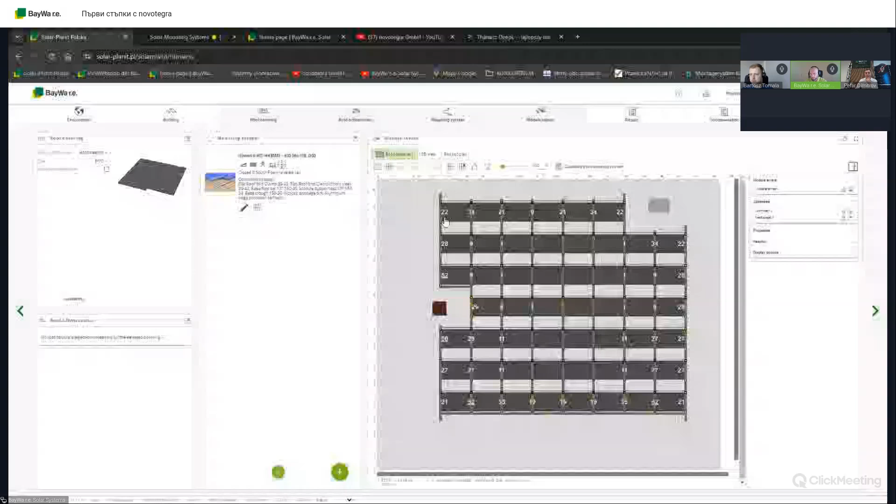Look at this here. You can see the numbers here. This is the ballast which is needed on the rails. It's put on the rails. But in the middle of the module field, look at this, there's no ballast. That's because all the modules on this module field are actually connected on the same rails. So you don't need any ballast in the middle of the field, but yes, of course, some ballast on the edges. But look at this ballast, it's not so big, 20, 27, maybe 50 kilos in some places.

So you can also see the average weight, like I wrote in the chat before. The average weight of the PV system, the construction, the modules and the ballast per square meter is around 15.9 kilograms. So it's really, really low.

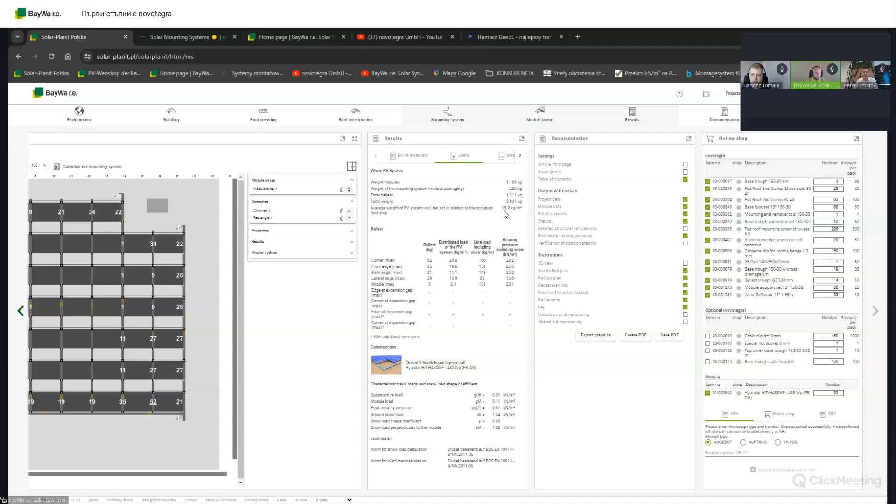Yes, that's one case. And the second case, I can see there's a question about grounding the installation. The whole installation is made of aluminium, so you don't have to put grounding on each module. Our clamps will provide you the continuity of the conductivity. Of course, if you have some doubts about this, we have a special clamp for this to provide this conductivity 100%.

But normally our clamps have two teeth, let's say, which take care of the isolation made on the modules by the manufacturers of the modules. So there should be no problem with the conductivity between the modules, but of course you have to provide the grounding for the whole, at least each module array. So I think that's a good answer.

I see the next question here about a list of all the information which would be needed from you to make a correct planning in Solar-Planit. So I would say take a look at Solar-Planit. For example, for flat roofs, you need just a few pieces of information from the customer. You need, of course, the building dimensions and the free space where you want to put your PV installation. Besides that, you also need the roof inclination from 0 to 5 degrees. This is, of course, the flat roof. 5 degrees is the maximum.

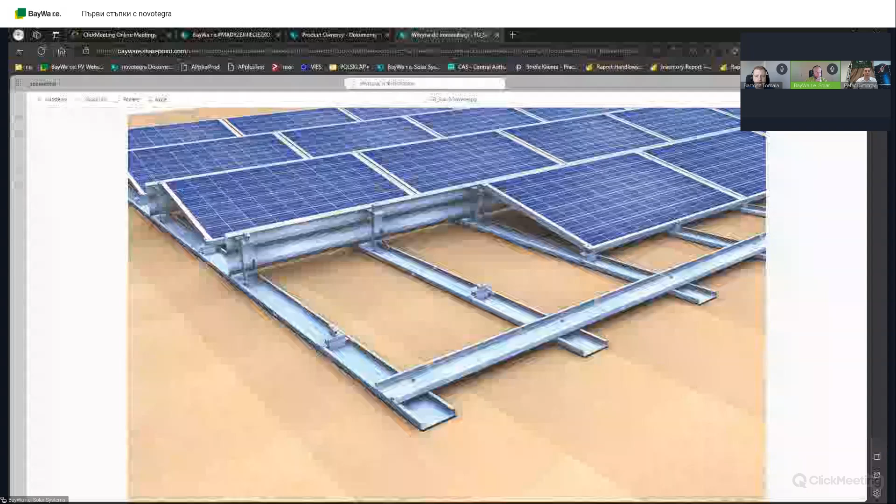Yeah, this is it. The third rail is in the middle, under the middle of the module, and now you have 6 clamping points, 4 on the edges and 2 on the long side. And this makes it possible to build installations in areas with a big snow load.

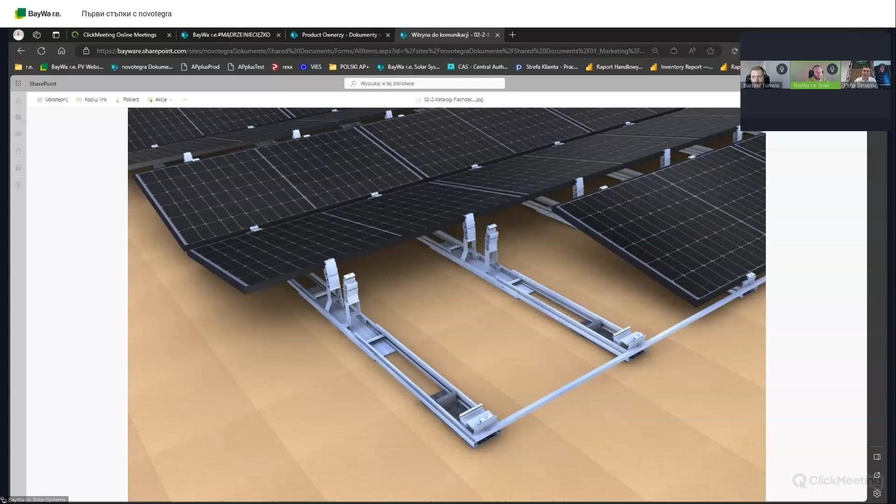as you can see now on the picture, the rails will be mounted in the quarter mounting point. So it will also be possible to build installations with big modules, and it should not be especially expensive. Thank you.

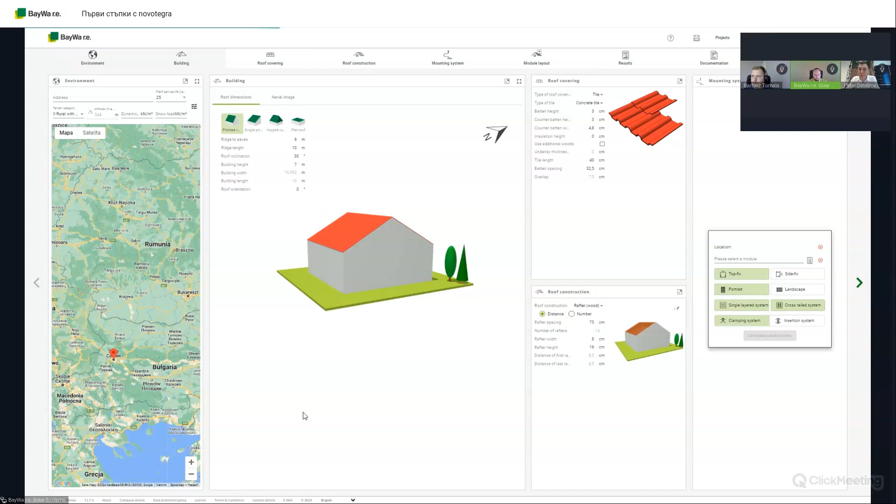Sorry to interrupt you, but I saw that it will be convenient to lead it in Bulgarian, so I will try again to share, or you can share, I can explain. Oh, no, I will end the sharing. Okay, I will try again to share. Okay. Do you see my screen?

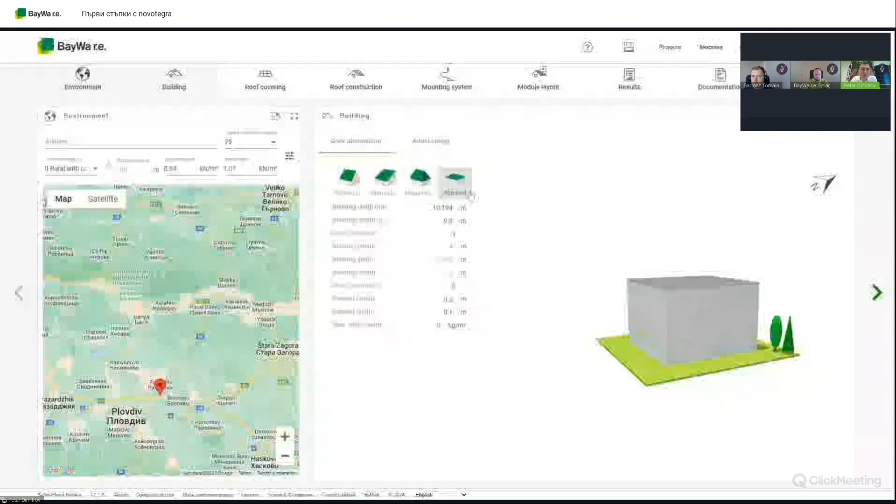Yeah, we can see Solar-Planit, yes.

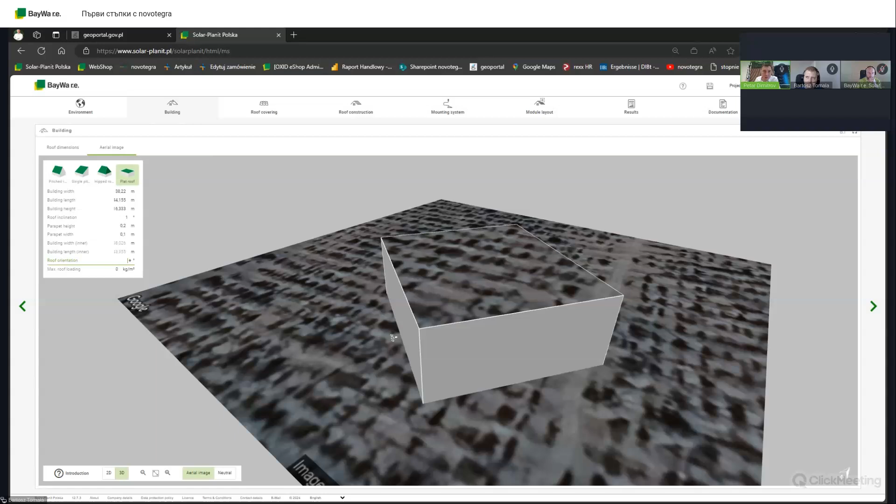Bartosz, can you explain the orientation of the building and how they can... I was showing already how to change the building. Unfortunately, the area here is only the woods, as I can see, or some farms. But you can rotate, of course, the building. You can rotate the whole area if you are using the right button of the mouse.

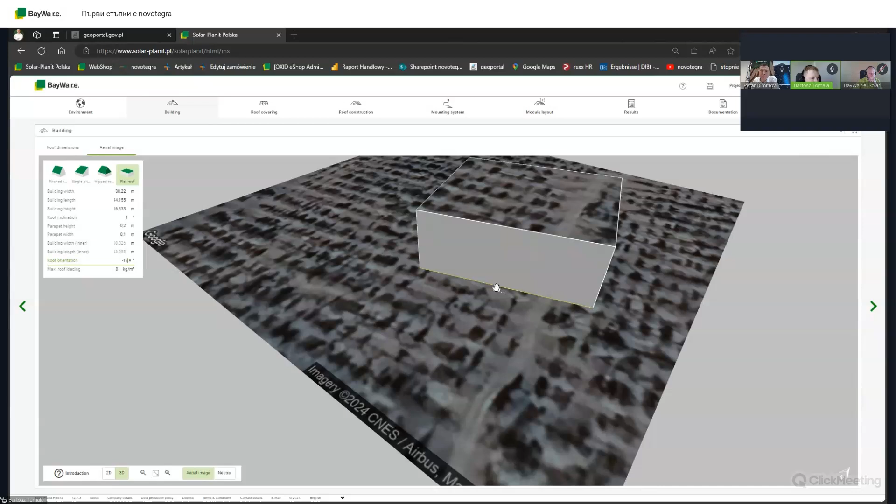The main part here to show is this arrow here, the white arrow. It indicates the front edge of the building, and this yellow rotation arrow shows us the back of the building every time on each type of the building. Of course, you can make it by mouse, but you can also type here the roof orientation. If you know there's, let's say, 20 degrees from the south rotated, you can type it here. You don't have to rotate it.

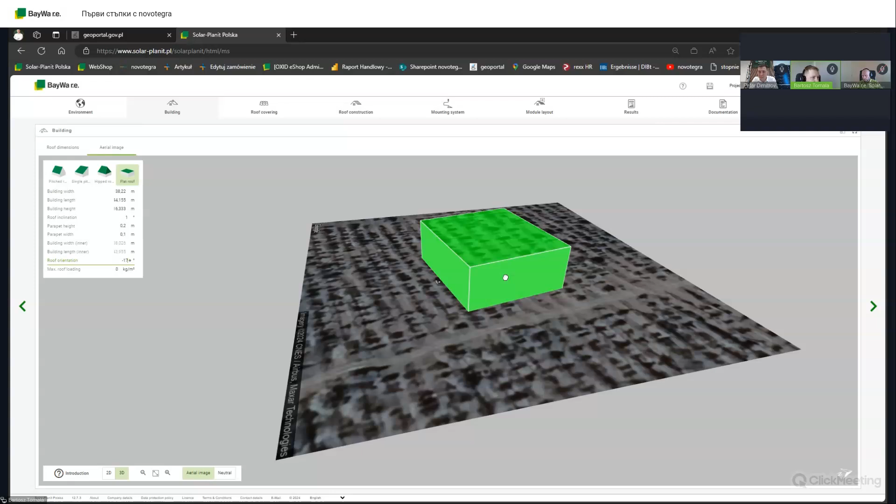But if you choose the building area somewhere closer to this, let's say, city, I would hit something, and of course here you can see the values of snow and wind loads. So that's important for us to compare these values with the module resistance, if we don't clamp the modules in the quarter of the long side.

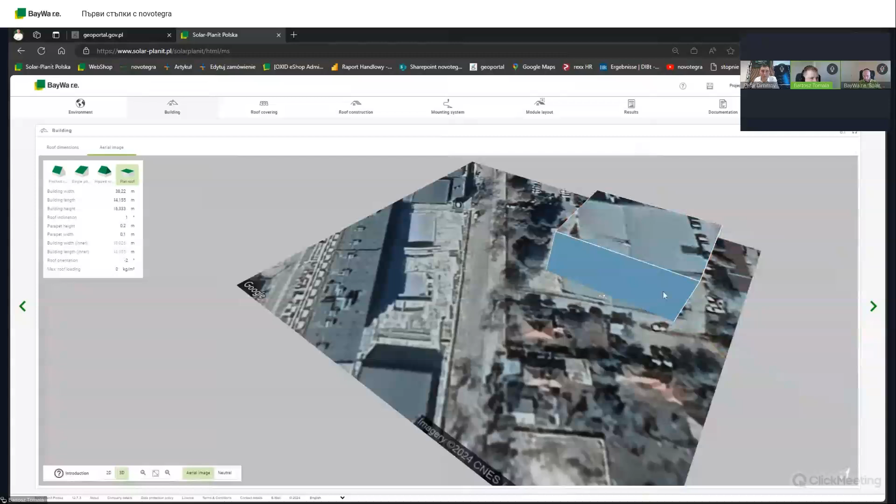So for example, here we have the building. Let's say it's the flat roof building, and you can just very fast dimension the building if you want. If you don't know the specific dimensions, for example, by measuring yourselves or from the design from the customer, you can now just make it like this. Of course, there are parapet dimensions also, the inclination of the building roof, and the case which Bartosz Tomala already mentioned a few minutes ago, the maximum roof loading.

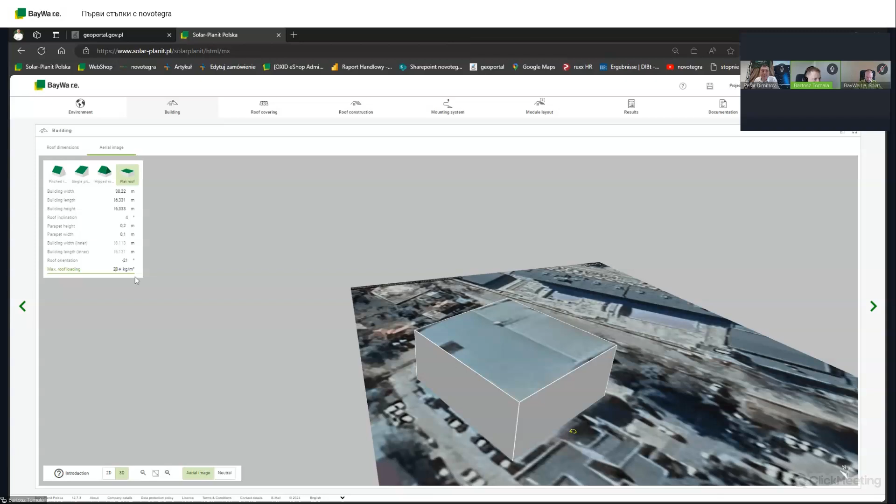If you know that there is a limitation of the ballast, or not even the ballast, but the weight of the additional construction on the roof, to put the safe construction, you can type here, for example, the limit 20 kilos per square meter, and now after you design the construction, the program will try to put the average ballast below this roof loading, and not only the average, but in each place it will try to stay below this value. Of course, sometimes there is no possibility to stay below, and it will be marked by the program in red where there is overload.

So I think that for now it's everything. I can see there are some more questions, but I haven't translated them yet.

I answered the questions. One was how much time it takes to confirm one project and return an offer - it's 1-2 days. The other was about how much time it takes to deliver the materials. So I answered those questions.

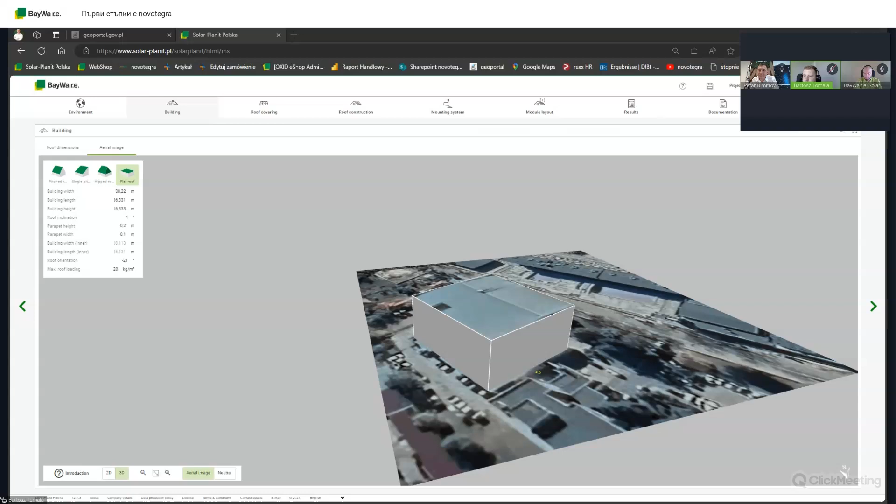I would like to say also, Solar-Planit is the tool for our customers, for you. So you can create an account, even if your account is not connected to the web shop and you don't see the prices. But when you already have the project in Solar-Planit, it's really 3 minutes for us to give you the price for this system. So the main thing is to create an account in Solar-Planit, make a drawing, make a plan as you wish, and then we can give you the price just on the phone in a few minutes.